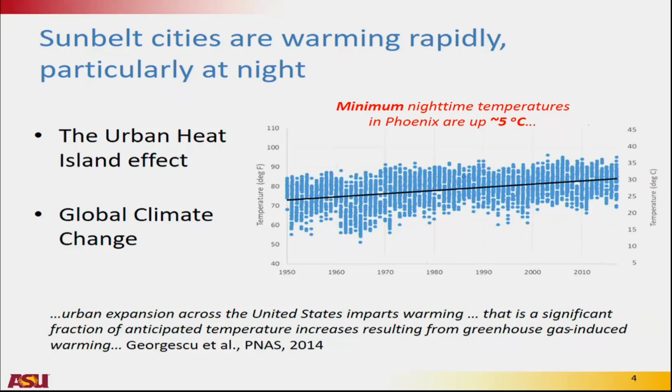And there was a paper almost a decade ago now that made an argument based on atmospheric modeling of regions across the country that demonstrated that anticipated global climate change is on the order of the same magnitude as the anticipated urban heat island warming associated with the expansion that we're expecting to see in these parts of the country. So it's worth noting that a lot of the climate change that we're dealing with locally is locally manageable. And so that's what a lot of my focus today is going to be on.

Now, the reason why we care about extreme heat across these cities is for a number of reasons. Obviously, thermal comfort is one of them. In the extreme, heat-related morbidity and mortality are of growing concern. And here what you see plotted is just in Maricopa County, which has a very strong health department that gathers very good data. They've tracked heat-related deaths over the past decade or so. And what you see is a very steady increase in the number of deaths per year.

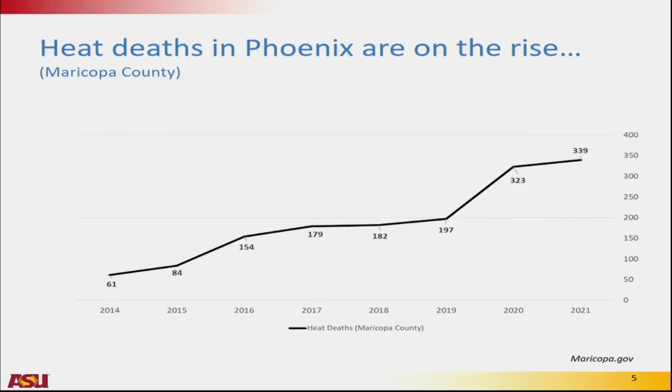So the population of the Phoenix metro area of Maricopa County is on the order of 4 million people. Last year, we had 339 deaths that were directly attributable to extreme heat. So that, you might think, is an argument for, wow, we're going to see increased deaths going forward. But at the same time, we have to recognize that the links between heat and mortality or morbidity are not simple.

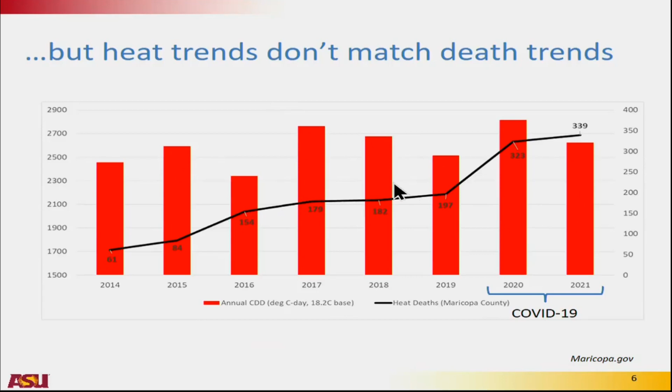So here I plotted just one metric of the thermal conditions across the city. This is just cooling degree days. You can do it in terms of maximum temperatures or average temperatures. But from the period of 2014 to 2021, what we see is that there's clearly a disconnect. Sometimes you'll see a decreasing trend of temperatures for several years, but flat or increasing deaths. Sometimes you'll see it just the opposite, very, very significant decrease with an increase in deaths. So it's clearly not just the heat.

Another thing that we need to recognize is that not all these deaths are happening indoors. I think there's this perception that that's the case. And in fact, in the Phoenix metro area, it used to be about half of the deaths were attributable to indoor exposure. Now it's down to about a quarter of the deaths.

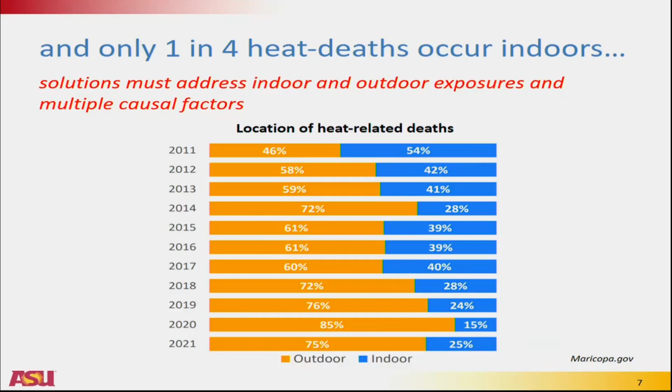And part of that is due to increased homelessness. Part of that's due to increased prevalence of air conditioning in buildings and better air conditioning systems in general. But what we see is about a quarter of the deaths are in an indoor setting. So these factors combined make us recognize that we need to think about solutions that address not just the indoor, but also the outdoor exposures, and that we also consider what are the other causal factors that are contributing to our rising death rates.

And I started my research career back when I was a grad student, looking at how can we cool cities. I focus on the city of Los Angeles, California, and back then our focus was, well, what could we do to cool the entire city? So we would in our models plant 1 million trees uniformly distributed across the city and so forth.

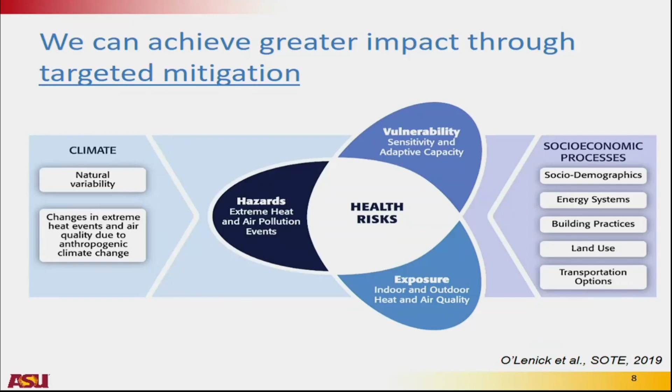But increasingly, we're recognizing that if we really want to have a significant impact, maybe we want to target our solutions. And so we can achieve greater impact by targeting our mitigation, recognizing that the health risks are really at the intersection of the hazards. So it can be heat hazards, air pollution hazards, exposure, and then, of course, vulnerability. So what are our most sensitive populations? It's typically the elderly, it's typically the very poor that have low adaptive capacity and so forth.

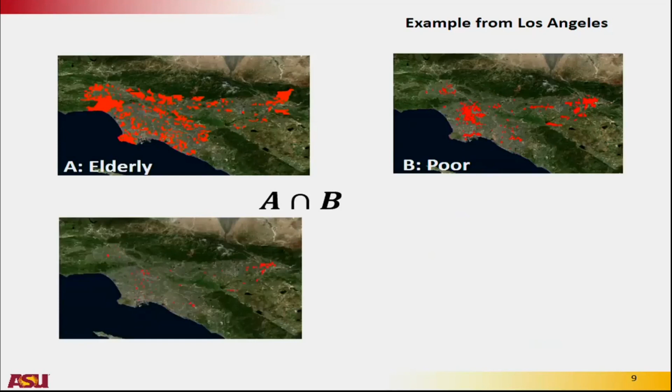So this is just an example from some work we've done in Los Angeles where we've asked the question, where should we focus limited resources to try to cool the city to have the most benefit? So you can look at census data and you can identify where some of the most vulnerable populations live. So the elderly, the poor, you do an intersection of elderly and poor, and you get a much smaller segment to look at.

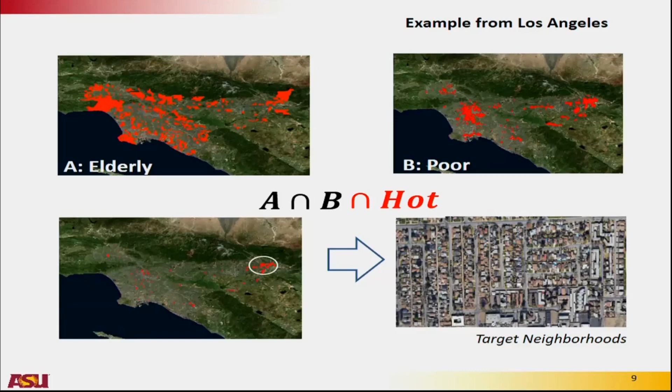You then add in where is it the hottest, and certainly, LA, California, being coastal, you don't really get extreme heat till you get a little further inland. So you can identify much smaller parts of the city where you can really have a huge impact with your limited resources. So a lot of our work lately has really focused on that approach.

And this brings me to another opportunity that we've identified in Phoenix, which is that not everyone is uniformly vulnerable as we would expect. But if you look at certain housing types, so those who live in mobile homes or in manufactured housing, they're on the order of 5 times more likely to die of extreme heat than individuals living in any other kind of housing. And then I know, for example, say in the European heat wave of 2003, it was primarily the elderly living on top floors of apartment buildings. In our case, it's much more these low income, poorly constructed buildings that are most at risk.

The other thing that we focus on a lot in my group is the passive survivability of buildings and the recognition that power outages are a reality, and actually our electric grid is incredibly vulnerable. And if you just look at the power outages that we've had over, say, the past 15 years, this is a little bit dated, but if you limit yourself to what we consider major power outages, so power outages affecting at least 100,000 customers, that's more than 100,000 people, for at least 10 hours, we had 525 such outages in the US alone during that period.

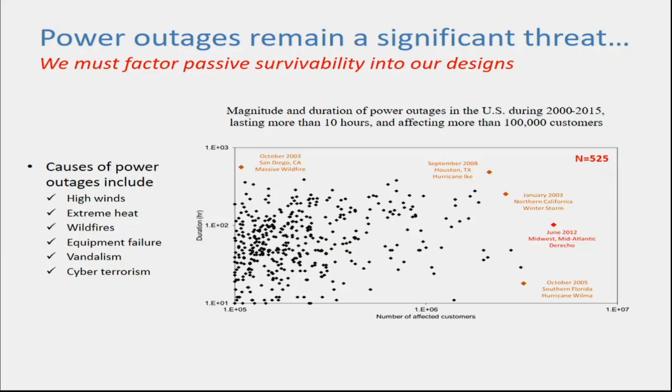So that brings me to our approach for working with local governments. So specifically, we see our university as being really a research partner or the research arm for local and regional governments.

And we recognize that there's a need to have the university play a role in informing government of the pros and cons of different technologies, life cycle analyses, and actual performance metrics, because industry oftentimes will try to sell things to the city governments that are not necessarily vetted. And so our goal is to be that independent agent working with government and stakeholders to identify solutions that work the best.

So what I'm going to focus on for the rest of my time is just some example projects that we've been working on in the Phoenix metro area with local government. So there are 22 local cities that make up the Phoenix metro area. And so we've been working with a number of them, 3 of the largest cities in particular, to identify solutions and to try to see if we can really deploy solutions at scale.

So the first example I'm going to give you is a really interesting project that started about 5 years ago, shortly after I arrived at Arizona State, and the city had just received a redevelopment grant from the Housing and Urban Development Department from the US government, and it was going to allow them to redesign a very old development that was poorly constructed. It was costing them $1 million a year to maintain.

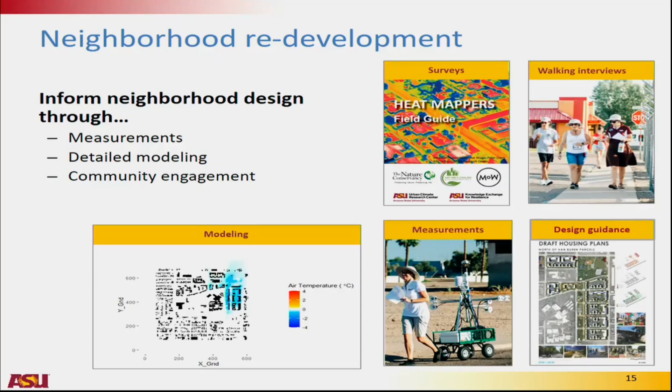And so we designed really an experiment that included everything from physical measurements. We have about 9 weather stations distributed throughout the area that are gathering data continuously. We did walking interviews with residents. We did surveys of residents. And then we informed our models with these observations to try to understand if you make a variation on the design, what does that do to the outdoor thermal environment? And so that is a really good example of sort of university, community, government engagement around providing design guidance. That project is still in the construction phase, so we don't have any results to share from it.

Another thing that we're doing with the city in Phoenix is, again, recognizing that it's probably not very cost effective, especially in a city like Phoenix that's water stressed, to plant, say, 1 million trees, right? But the city has this concept of simply creating a network of cool corridors in some of the most vulnerable communities that facilitates movement of residents between their homes, their employment, and their places to play and be educated. So these are typically, like I just visited one last week that was designed to go between a school and the local library. So, this is a nice idea.

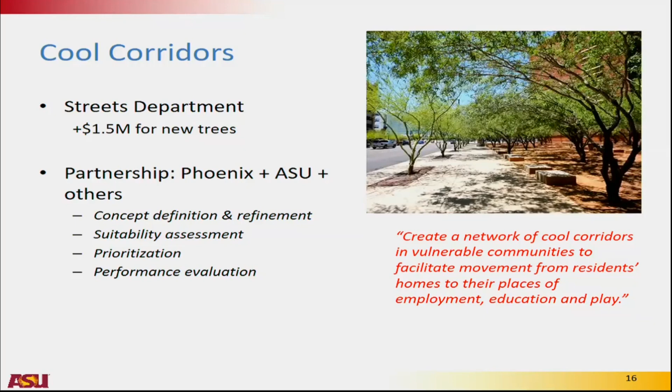In reality, trees, especially in the desert, take quite a long time to grow. And so you typically plant trees that are not very large, and they take quite some time to really cast the shade. But it's a long-term strategy, and ASU, my university, is part of helping to identify or prioritize areas where these cool corridors should go, and then evaluate them in terms of their performance, in terms of the mean radiant temperature environment that they provide for pedestrians.

And recognizing that trees are a challenging commodity in a desert climate, even though we do use desert-adapted native trees from the environment, we want to supplement this concept with shade structures that are more artificial in nature. And so we've been exploring a couple of technologies related to providing shade that is not just your typical shade, but that uses surfaces that have extremely high solar reflectance and extremely high thermal emittance that allows you to create shade surfaces that are actually cooler than other surfaces in the environment. They radiate less heat down to the pedestrians underneath, and as a result, you will feel more comfortable.

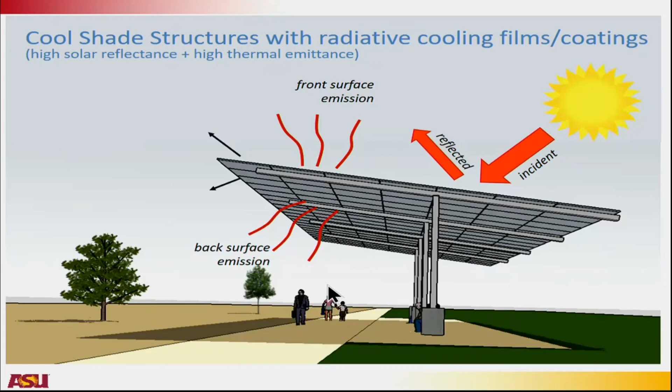So we have tested this out in a partnership with local government. In this case, it was City of Tempe with their transportation program and an industry that provided a cooling film that has these radiative properties that we desire. And we modified bus shelters, and we monitored.

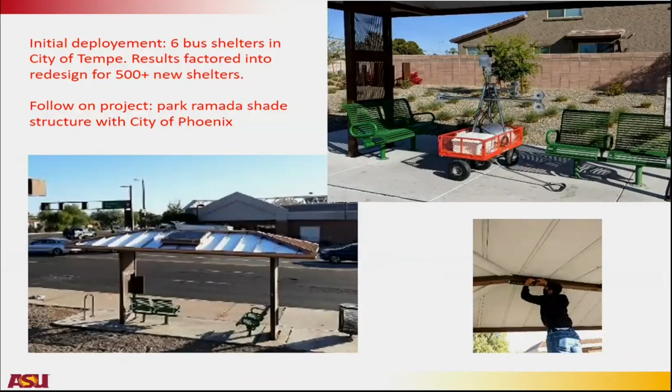We had fixed monitors on the shelters themselves to look at surface temperatures, air temperatures, and we did periodic measurements of mean radiant environments for the bus shelter users. And what we found, and I'm going to go through this relatively quickly because I know we started late.

But what we found is the orange dots here are the conventional bus shelters, so just the standard old bus shelters. The red line is sort of a running average. So follow the red line for conventional, and then this darker line down here is the surface temperature of the shelter for the radiative cooling shelters that we tested. And what you see is this is actually a difference of temperatures from the surface to the air. So 0 means the surface was exactly the same temperature as the air.

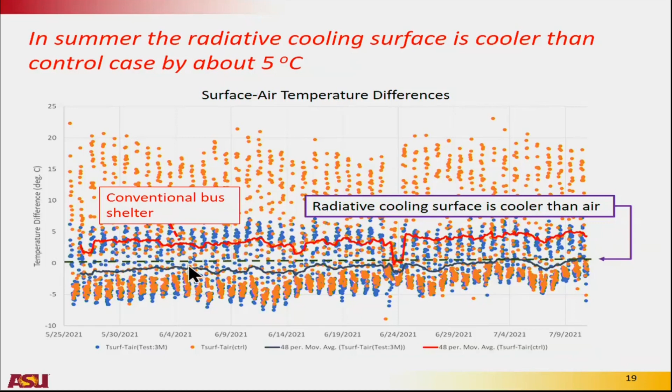And what we see, lo and behold, is that your typical bus shelters are on the order of 5 degrees Celsius hotter than air, averaged over the day, whereas the radiative cooling shelters were on the order of a degree cooler than the air. And so if you can create surfaces that are consistently cooler than the air that surrounds them, then as the air flows over, the surface picks up heat. The surface then radiates that heat through the long wave radiative window, mostly out to space.

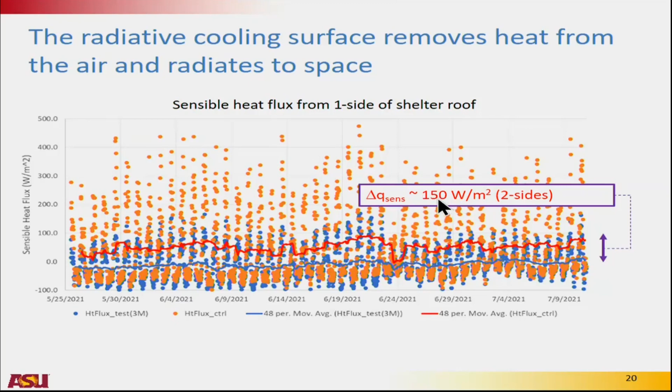And so it's a mechanism to provide both that local thermal comfort, but also to provide local cooling to the airshed. And so this just shows that if you look at the top and bottom surfaces of one of these shelters, on average, we get a reduction of about 150 watts per square meter of heat convected into the airshed. So it's an effective mechanism for cooling the airshed.

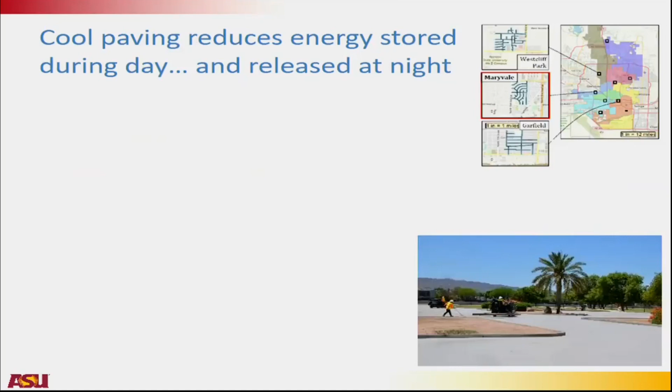Another project that we've done with the city of Phoenix is looking at paving. So paving in a typical city in the US, there are lots of surface parking lots, lots of paving. It's 20 to 25% of the surface area of most cities. And so the question is, can we use what's known as cool paving, again, more solar reflective paving than your standard dark asphalt, to actually absorb less of the solar energy during the day, so it then releases less heat into the airshed at night. Because as you'll recall, that's our real big challenge in Phoenix, is that we've been heating up so much in the nighttime hours, we need to make sure we're storing less heat during the day.

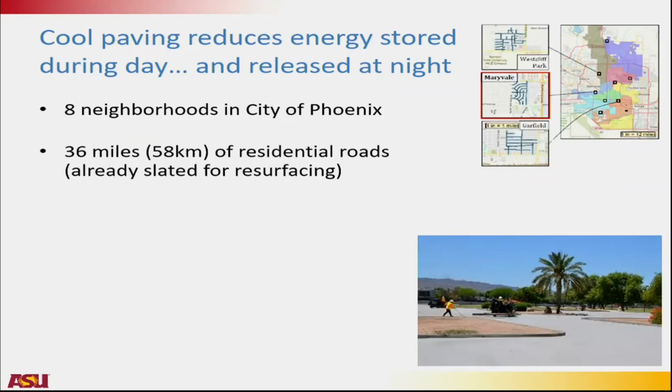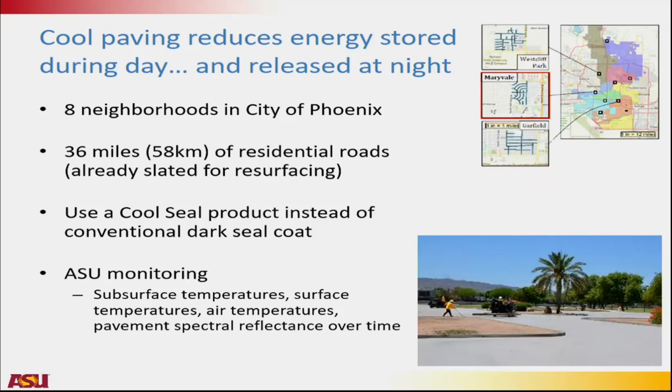So this study looked at 8 neighborhoods in the city of Phoenix. It modified 58 kilometers of residential roads that were already slated for resurfacing. So your typical road, at least in Phoenix, lasts about 5 to 7 years before it starts to develop cracks, and you typically seal coat it, usually with a very dark surface. Here, what we're doing is we're saying, well, what if you seal coated it with a lighter product? So we used what's known as a cool seal product instead of the conventional dark seal. And then ASU was monitoring subsurface temperatures, surface temperatures, air temperatures in the neighborhoods, and we were sampling the pavement spectral reflectance over time to see how it degrades.

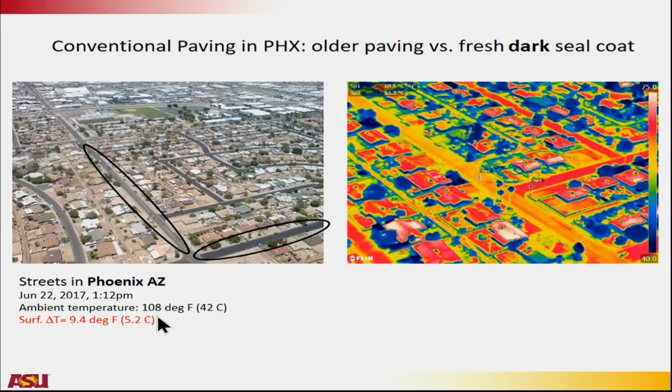And so this is just an aerial shot of a typical neighborhood. There's no cool paving in here. This is just an aged street. So dark asphalt lightens over time. And then here they had recently done a dark seal coat. So this is just the normal difference that you see. And if you look at the differences in temperatures between these two surfaces, you see that as asphalt ages, you get a benefit. It's more reflective, and the surface temperature is reduced by about 5 degrees Celsius on a pretty hot summer day.

Now, if you look at what happens when, instead of replacing the aged asphalt with dark, you replace the aged asphalt with light, the cool seal, we get about another 7.5 degrees C cooling. And so it stands to reason that you would see about a 12 degrees Celsius difference in surface temperatures if you do cool seal instead of the black seal.

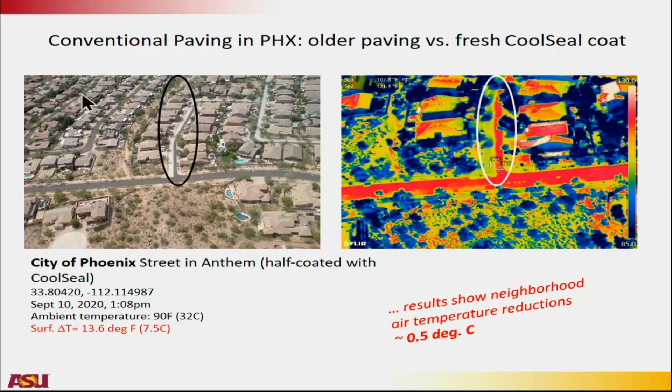And what we did also was we ran a number of measurement campaigns where we drove instruments and we pulled instruments through the neighborhoods pre-sunrise, early morning, noon, around sunset, and then in the evening hours. And we looked at identifying temperature differences across a neighborhood that had entirely cool seal. So this image is when they were halfway done with a road. So we did a neighborhood that was entirely cool sealed and then a neighborhood that was just conventional aged asphalt. And we found on the order of a 0.5 degree cooling of the airshed. So that's some of the work that we've done with the various city governments trying to cool outdoor ambient air.

Now I want to just spend a little time, and I don't have much time, so I'm only going to talk about really one building-focused solution, sort of the reflective properties of building facades. We've also done a lot of work with thermal mass and phase change materials, which I can talk about later if we have time.

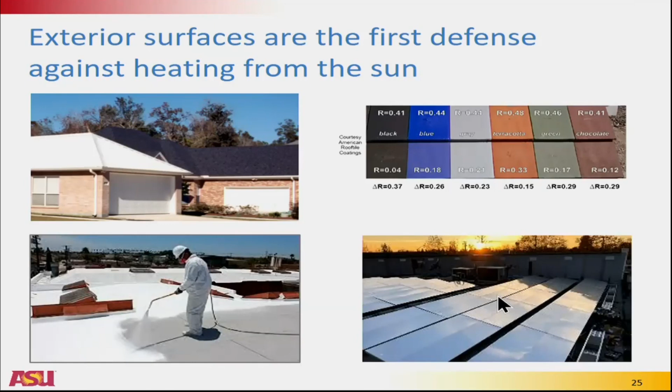So, oftentimes in cities you get very dark rooftops, and if you simply replace them with lighter rooftops, you get dual benefits, right? So you get cooler surfaces, so you're convecting less heat into the air in the city, but you're also conducting less heat into the building, so you have better thermal resilience, you have better thermal comfort in general, and less energy use if you have air conditioning. And you can go to the extreme. These are some panels that are actually the high solar reflectance, high thermal emittance panels.

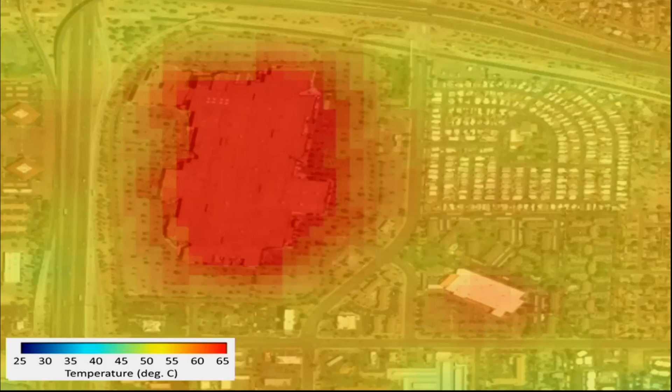And that's because the roof is very well insulated, so it's storing most of that heat near the surface, convecting into the air shed. Same thing with this hardware store. It's as white as these residential buildings, but it's actually a little bit hotter because it's better insulated. So there's this interesting thermal connectivity between the building facade and the indoor environment. As you insulate the buildings better, the building surface is more important for the ambient environment. As you have less insulated buildings, it's more important for the interior environment.

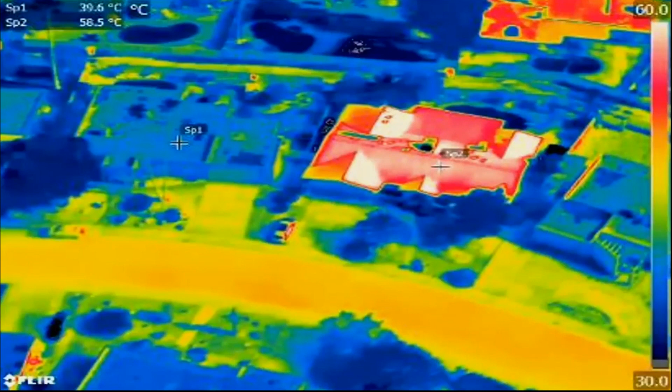So you can still go around Phoenix today. This is a helicopter shot of some buildings not too far from my neighborhood, just a couple of miles away, where you see dark roofs. And of course, those dark roofs are extremely hot. They're contributing to heating the neighborhood, as well as to increasing the air conditioning bills for that house.

So one thing that we've done, this is not a demonstration project, but just a modeling project to help inform the work that we've been working on, is we looked at the question of if you replace a conventional roof, so we define conventional as a 20% reflective roof, 0.9 emissivity, which is fairly typical, with what's typically considered a cool roof or a white roof, so solar reflectance of 70%, also emissivity of 90%, or you replace it with a passive daytime radiative cooling roof with a much higher solar reflectance, much higher thermal emittance. How does that affect building roof surface temperatures, convection into the environment, but also the air conditioning energies for buildings? We did this across 8 climates, 8 cities, including 6 that are in the Sunbelt.

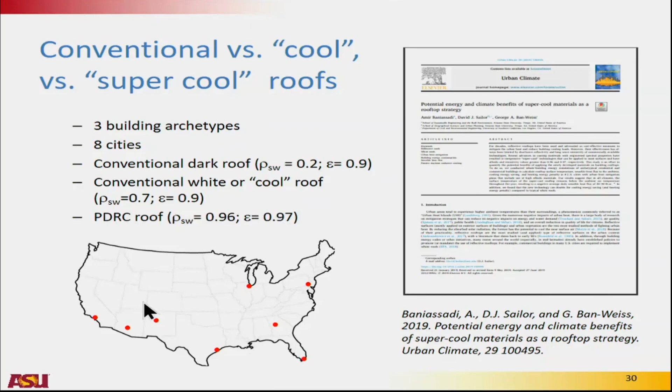And lo and behold, what you find is this is again a plot of surface temperature minus air temperature. So this is surface air temperature differences. And so 0 means at the same temperature. And if you have a conventional darker roof, you'll oftentimes have the surface that's 20, 30, or even 40 degrees Celsius hotter than the air. And at night, of course, it subcools. A white roof still gets 10 to 20 degrees Celsius hotter than the air. A super cool or passive radiative cooling roof actually never exceeds the air temperature. So it's always taking heat out of the air, radiating it to space.

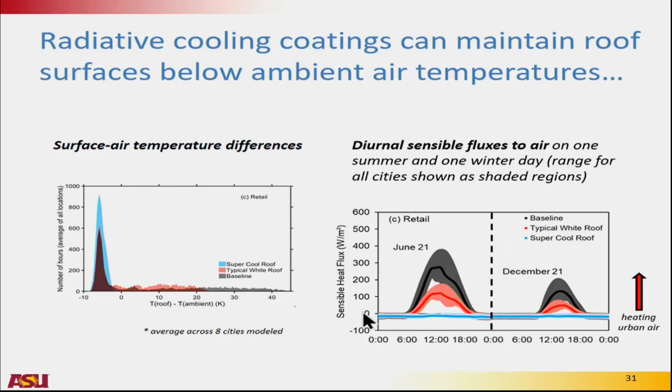And you can look at the results in terms of energy use. Here I only have it in terms of diurnal sensible fluxes. Again, the conventional roof is this dark area. This is summer over here for a retail building. And you typically have a sensible heat flux that peaks on the order of 300 watts per square meter. Put in a white roof, it peaks around 100 watts per square meter. Put in a passive radiative cooling roof, and it's sub-zero. So it's less than 0 watts per square meter, meaning it's taking heat out of the air.

So I just want to close with a final thought here.

So one thing that we've been working on is, I've done a lot of work over my career on what's known as anthropogenic waste heat. So how much heat we're putting in the environment as a result of our energy consumption. And we've started thinking about this differently lately.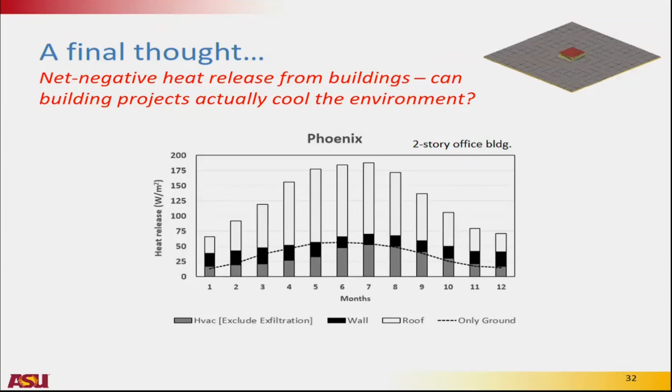So the question here in red is, can we get net negative heat release from buildings? So can we have building projects that actually cool the environment relative to the land they replaced? So this is kind of like a net negative carbon concept, but it's applied to heating our environment instead. And the answer is yes. So very, very shortly,

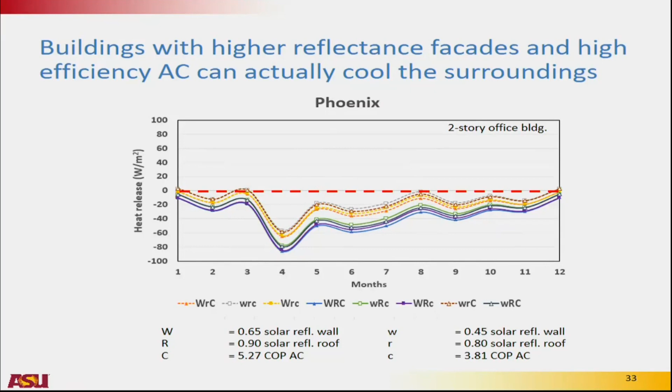these are just a number of different ways that you can get below zero. So this is relative to sensible heat flux from the land. Yes, in fact, we can across all months, and what's most important here is really the summer months, we can get below zero. We can have a building that is a net negative heat generator for the environment. So as we think about building out our cities, urbanization does not necessarily need to go hand in hand with increasing the urban heat island effect. So that's all. I'll just close on that.

Because you are good on time, I think we will take one or two questions just now. I like being accused of being good on time. I have a first one.

You said for the last slide, you also have effective air conditioning. So it's really the air conditioning that is removing the heat from outside. So you said the buildings where you could make them negative, so they could remove heat, they had a very effective air conditioner. Yeah. Well, so they had

we looked at 2 different COP levels for air conditioning. One is equivalent to what I just installed in my house, and then one was higher. So your typical newer air conditioning units give you that COP. So with existing equipment and just slightly higher solar reflectances of rooftop and wall surfaces, you can get sub-zero. So it's not all of the air conditioning.

Okay. And then of course those more efficient units, they're just rejecting less heat. So of course they're rejecting heat, but any heat they take out of the indoor environment, they reject back into the environment, plus their inefficiencies, right? So okay. So that's accounted for.